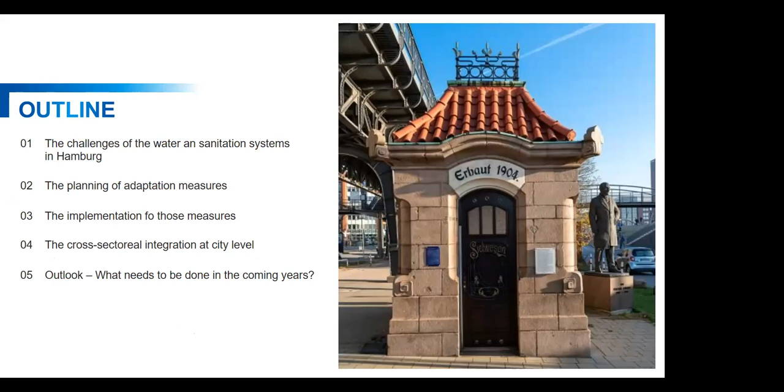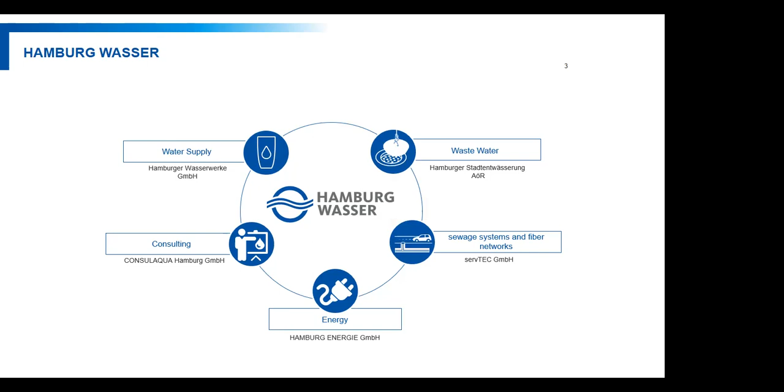So to introduce our company, Hamburg Wasser is a combined company which deals with water supply and wastewater. We also have, until the end of the year, an energy part which provides energy to the city by regenerative energies. They are leaving us, but now they are still with us.

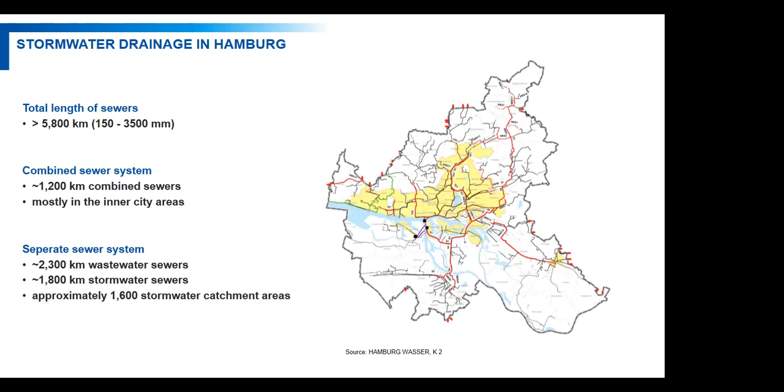So Hamburg has a long history of stormwater management and drainage systems. It has one of the oldest drainage systems in Europe, since I think 1848 or something like that, with William Lindley. A combined sewer system was implemented, and it was added to with a separated sewage system here in the outskirts. The yellow part is the combined sewage system. And we have different stormwater catchment areas.

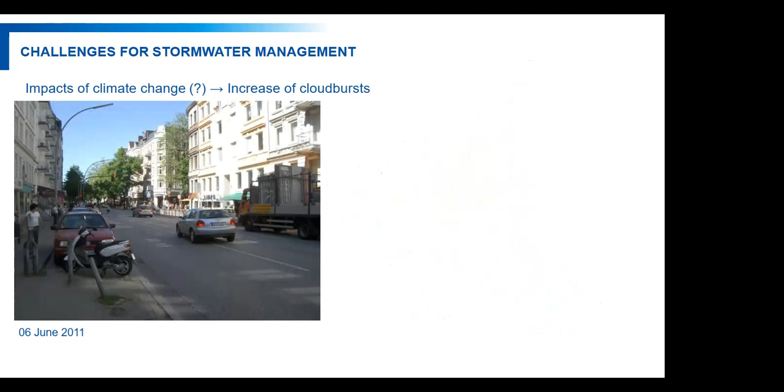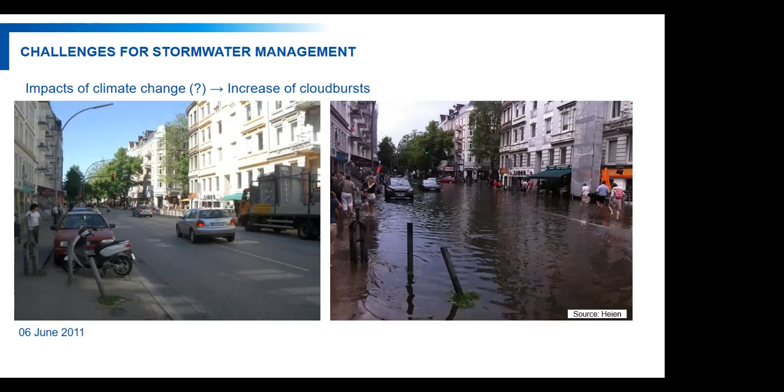So what does it mean for us? We have a lot of stormwater challenges. Is this a part of the impacts of climate change? The increase of cloudbursts we are also recognizing here in Hamburg. This is one example of how it could look. In June 2011, we had this example in one of the central city parts, and therefore we are trying to find solutions to reduce these events and reduce the high damages that these kinds of events cause.

On the other hand, we have a long sewage system which needs to be maintained and performed, and this is a challenge as well. And on top of this, there's climate change with higher temperatures, heat waves, and droughts. In addition to that, we have high tides on the River Elbe in Hamburg, and this means that we have restrictions for the free drainage into the River Elbe if there's a high tide, for example. And the probability of heavy rainfalls is increasing. This is what we need to deal with.

And Hamburg started with that in the early 90s to reduce the discharge into the rivers by a kind of relief program. That means that we have built interceptor sewer systems underneath the existing sewer systems to reduce the overflow into the river and to improve the water quality of the rivers all over the city.

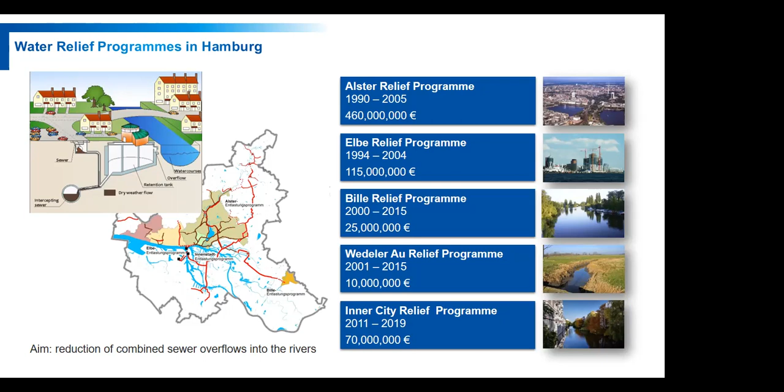So the last program was finished in 2019 with the inner city relief program, and we have a really good improvement of the water quality. So sometimes people are now swimming in the River Alster, which is one of the main rivers here in the city. And that wasn't possible 20 years ago, I think. That's a good success.

Another program which was started in 2009 was the project RISA, Rain InfraStructure Adaptation, and the idea is to develop Hamburg as a water-sensitive city. It's a cooperation between the environmental agency and Hamburg Wasser, and many stakeholders are involved with this, like the municipalities in Hamburg, the different districts, the urban planners, the traffic planners,

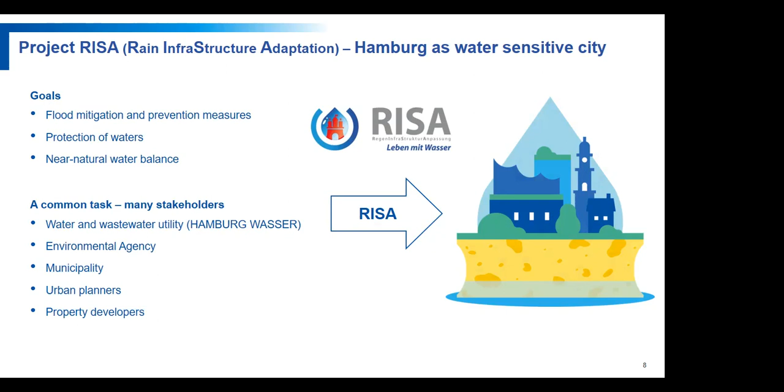people who are dealing with landscapes, for example. And the goals are to mitigate floods and do prevention measures in the rivers, to protect the waters in the city, and to gain a near-natural water balance. To meet this, we are trying to have a transformation of the urban water management. This means that we are trying to keep the robust sewage and drainage system within Hamburg, as well as to disconnect as many surfaces as possible with cooperations.

For example, this is a picture where a school was disconnected from our sewage systems, and we have tried to increase the infiltration rate underneath playground elements. Then we have some different multifunctional plants for rainwater treatment and stormwater management, but we are also lucky that we have a redundant water supply.

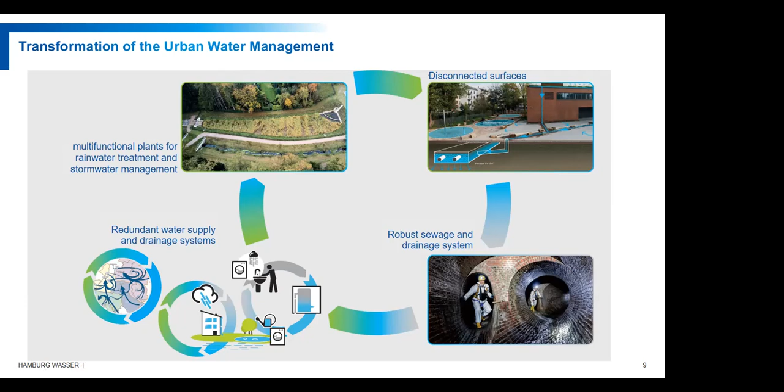Our fresh water is coming from the groundwater from different parts of the city, and this is very helpful for us, because they support each other. And on the other hand, we have one plant and one settlement where we are trying to close the different water cycles, like gray water cycles, black water cycles, but also rainwater cycles.

So what would the future look like in Hamburg? What is our main guiding strategy for Hamburg to become this sponge city? Here on this picture, you see different examples how to do this. So the aim is to reduce the runoff, the rainwater, to increase the evaporation and the infiltration rate within the city. And here you can see different examples.

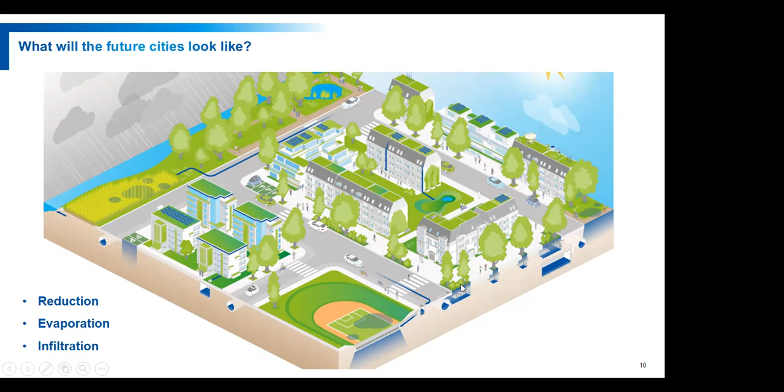For example, here on the first part, retention, green roofs where rainwater can retain on the rooftop. So here on a lot, to keep the water within some gutters, for example, to increase the rate of green roofs, to keep the water within the streets like tree rigoles. I will show you some pictures later. So here are some images of what this means in detail.

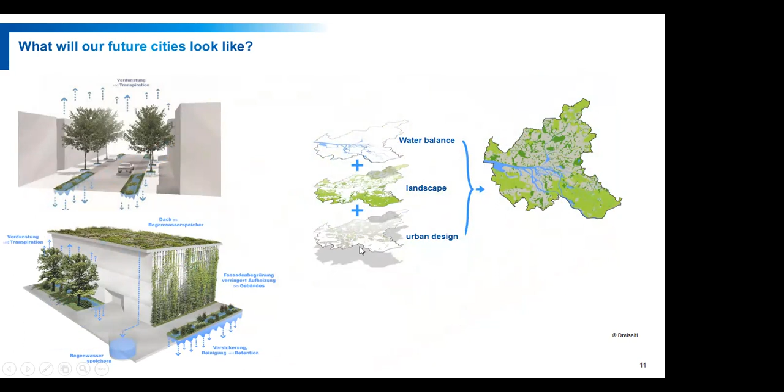This means to transform the streets, to transform the buildings, but also to think about urban planning and urban development as a whole picture, to combine water management with landscape architecture and urban design. This is what we are doing now, and we are talking to the urban authority about how to do this. To achieve this, we need a multi-stakeholder approach.

We are cooperating with different stakeholders in the city, like the State Ministry of Urban Development, the Environmental Agency, the Ministry of Transport and Innovation. Hamburg Wasser is one stakeholder, for example, but we are also working together with research at the university within the city to find some new ideas. And we have the district authorities also on the table with different programs.

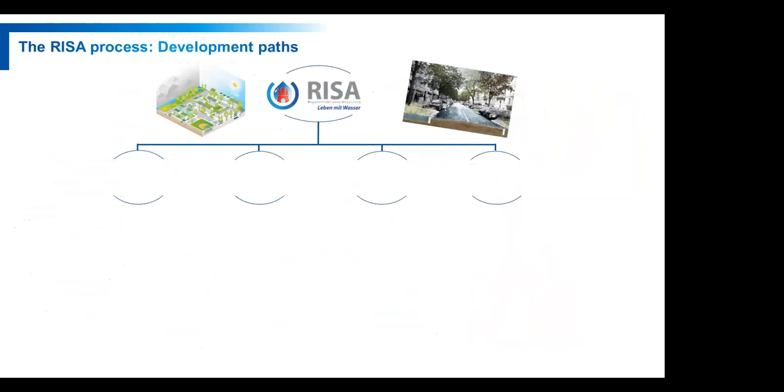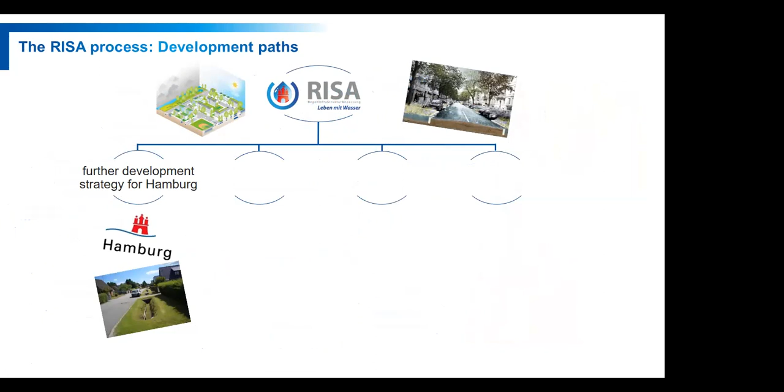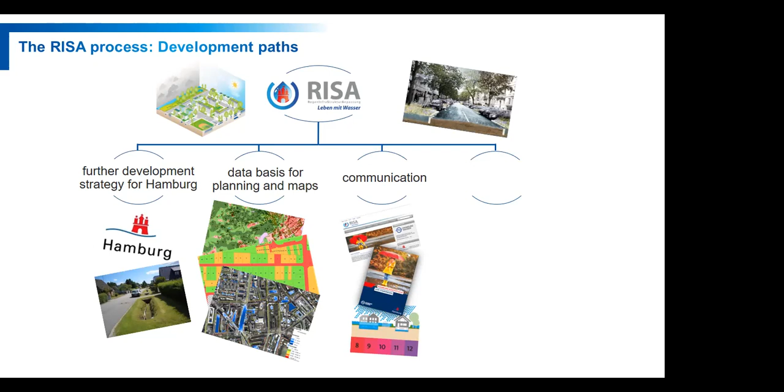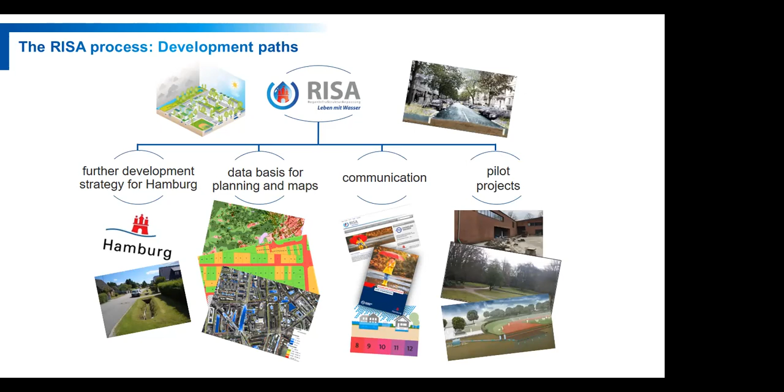The parts of RISA, or the different development paths, are these 4 steps I will show you now. We are talking about the further development of the different strategies in Hamburg. We are creating databases for planning and maps. We are communicating via different channels like our website, brochures, information tools. And we have to have pilot projects to see how we could implement it all over Hamburg.

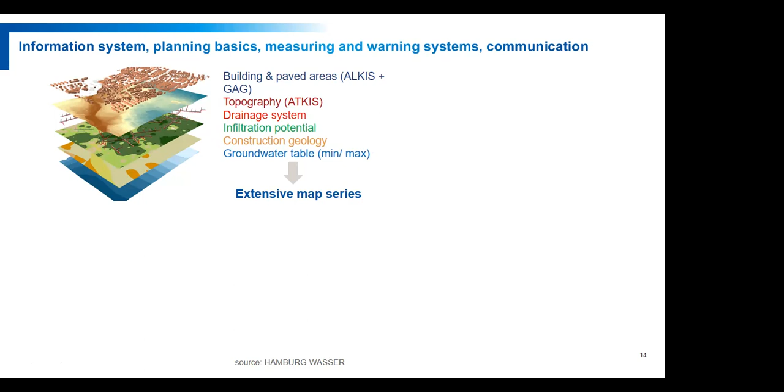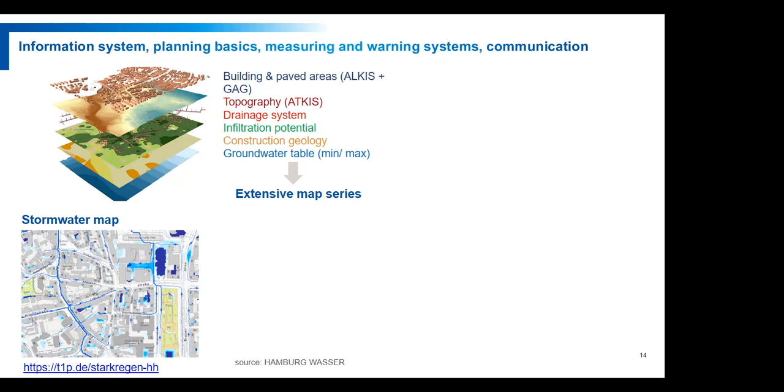So first, I would like to show you what we have regarding the information system as planning basis, for measuring and warning systems and communication. In the first part of the RISA project, we started with several maps which have information on topography, drainage systems, the infiltration potential, construction geology, and groundwater table. And one of the newest is a stormwater map, which shows where the low-lying areas in the city are, and where there might be problems during a stormwater event.

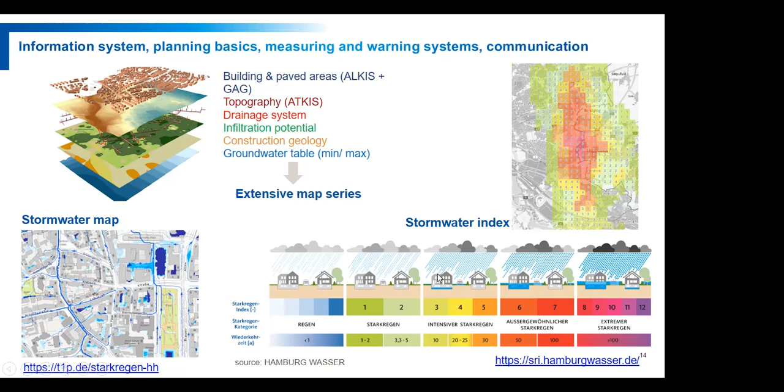And with the increasing numbers, you can see that there are some extreme events too, which our sewage system is not able to deal with. And then the people themselves need to protect, and we need to cooperate with the city and urban authorities for that. I want to give you a closer look at the stormwater map, so you can see how it looks. It's information which is available for everyone, for you too, so you can just click this link and have a look.

There is various information on this website. It's meant to inform the property owners about their situation on their lot, but it's also information for urban planners and traffic planners on how to improve the streetscape, for example, and the urban design and urban spaces, to keep the water where it is and to reduce water flows within the city. It's a topographic map. It's not a dimensional simulation of heavy rainfall events, so it's not a dynamic one.

Another map which is very helpful is a map on the infiltration potential. Here you can see it's based on the groundwater level and the soil composition underneath the city. So it's helpful to see where we can reduce sealing, and where we have the possibility to use the infiltration of rainwater, for example, all over the city.

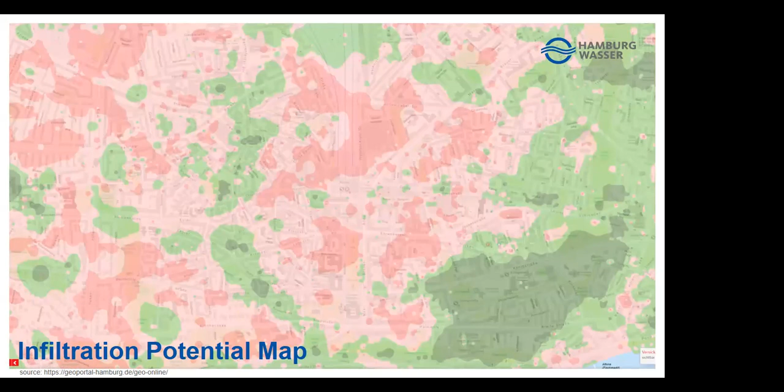To gain these goals, we have different cooperations, for example, with schools. We are trying to disconnect the schools, and we're supporting the schools authority, which is to reduce the connection to our sewer system with different examples.

Sometimes we have workshops with pupils where they have a look at their schoolyards, how to change the design of the schoolyard to improve the situation there, and to find places where the water can be caught on schoolyards themselves, maybe on the parking lots, but as well to have some spaces where water can be kept all over the area. Another example is the stormwater playground in Hamburg, Neugraben-Fischbeck.

It's a good example which shows how cooperation can work. We had several floodings nearby a school there, and the stormwater retention basin was too small, and we had no space to find another place. So we looked around the area, and we found this playground, and we started a cooperation with the planning authorities to keep the water of heavy rainfalls and

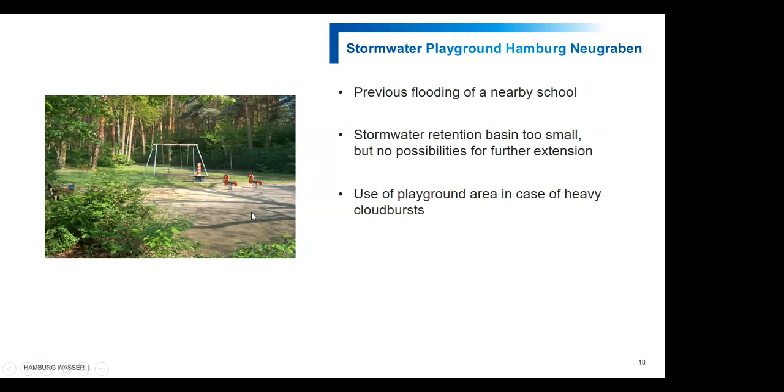cloudbursts on this playground. And here you can see how it looks during dry weather and cloudburst. So the water is kept there in these low-lying areas. We have some swales there to improve the infiltration. And the water drains as well to a protected well area and contributes there to groundwater recharge too.

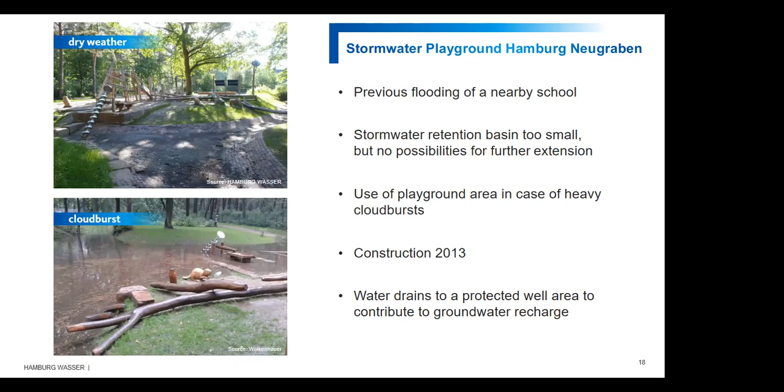Another, almost new example is the sporting facility at the Hein-Klink-Stadion. There we had an interesting situation. It was a hotspot for flooding. We needed to increase the drainage capacity in the higher parts here, because our sewer system wasn't capable to catch all the water. There was a flooding of a subway station as well, and we had the problem that the hydraulic situation of this river here wasn't able to keep the stormwater in case of a heavy rainfall.

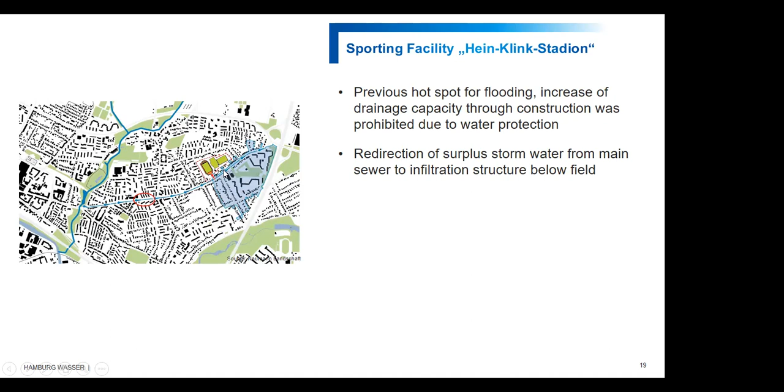So we needed to keep this water here in the upper areas. And by coincidence, this sporting facility needed to be refurbished, and we started to talk to the authority which was in charge of the refurbishment of this area, and we had the ability to install here a system to retain the water on the higher area.

So we have here a tank which keeps the sands and the bigger parts which come from the streets, and then the water flows down here to the swales and will be kept and infiltrated into the ground. And if there are heavier rainfalls, then the water can also be kept on the lower part of the sports field. So it's quite a success now, and I think it already kept some heavy rainfalls, and it keeps 500,000 liters. This is the capacity we do have.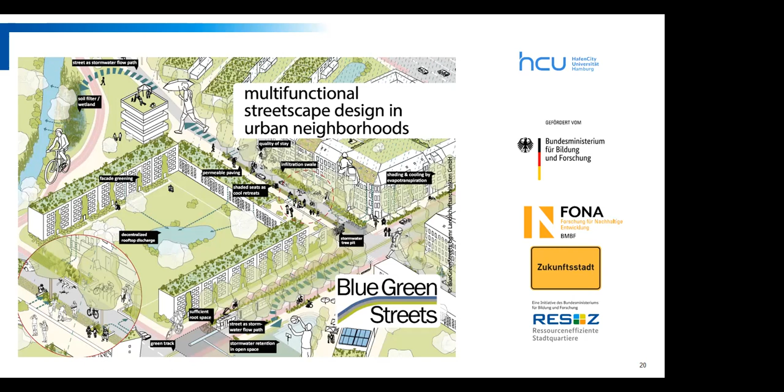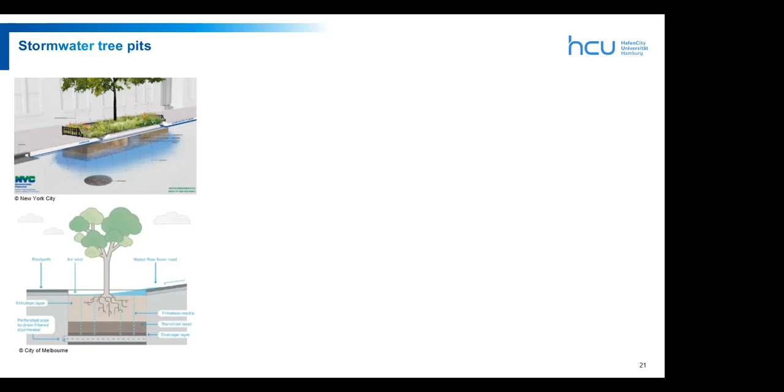So one example I want to show is how they are trying to work within the streetscape. They are trying to implement some stormwater tree pits in Hamburg, where the stormwater can be kept in these tree pits to give the water to the trees, but also to infiltrate it into the ground. So this is an example in Hamburg Harburg, which shows that the water is kept on the rooftops and will lead to a water reservoir here.

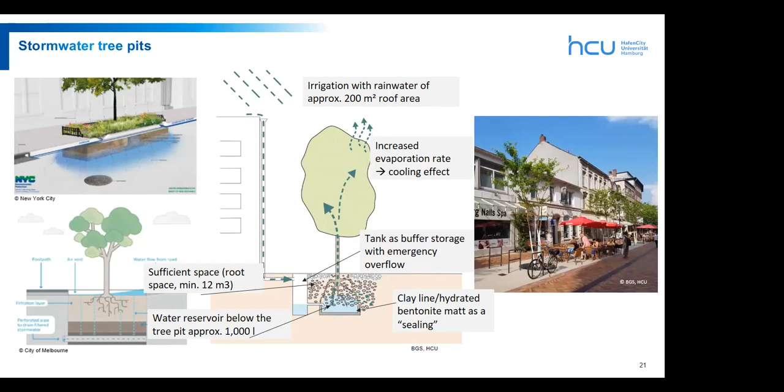There's an overflow to our rainwater drainage system too, and then it will be led into the tree to provide the tree with water, and that increases the evaporation rate and the cooling effect within the streets, and it helps to irrigate the tree. So here you can see the picture of the now installed trees. They are still a little bit small, but it's a possibility to improve the situation within the city. Another example are retention green roofs.

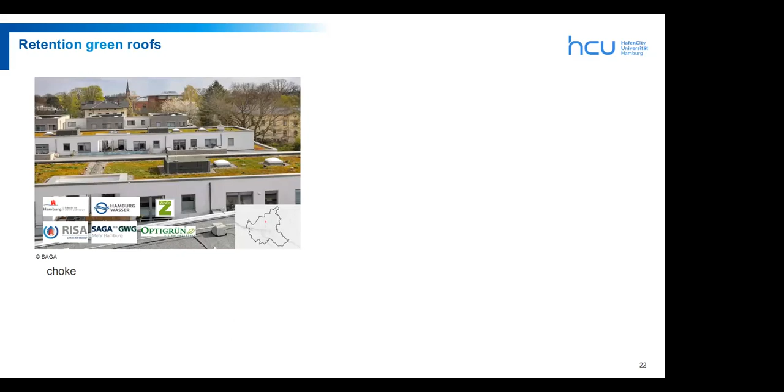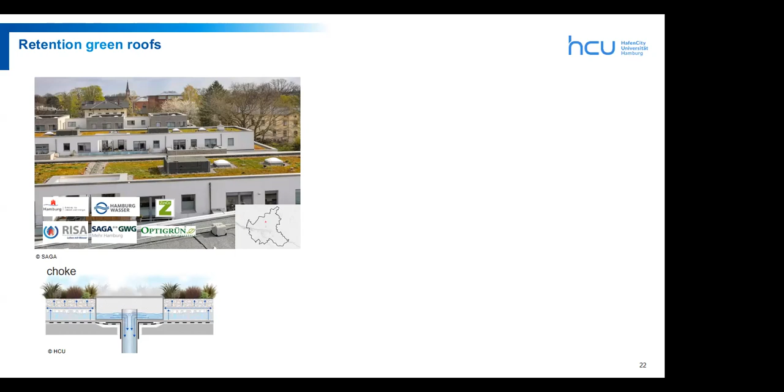Like here, it's built on a housing, I don't know the word now, but it doesn't matter. So it's built on different houses. They have different examples like extensive and intensive green roofs to compare them. They have these chokes on the retention green roofs which keep the rainwater on the roof, and they measure the flow from the roof and see how much water can be kept there.

Here you see some pictures of the construction phase, and you can see here the different examples of the green roof. No, this is the precipitation, and here you can see how much water runs off from the green roofs during an extreme event. And the best case is this lower part where we do have a high rate of green roof retention, and you see that only 17% runoff is happening during a heavy rainfall event.

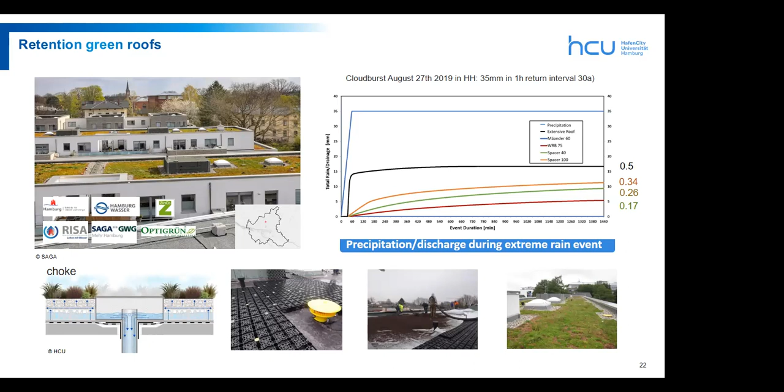So where do we stand now?

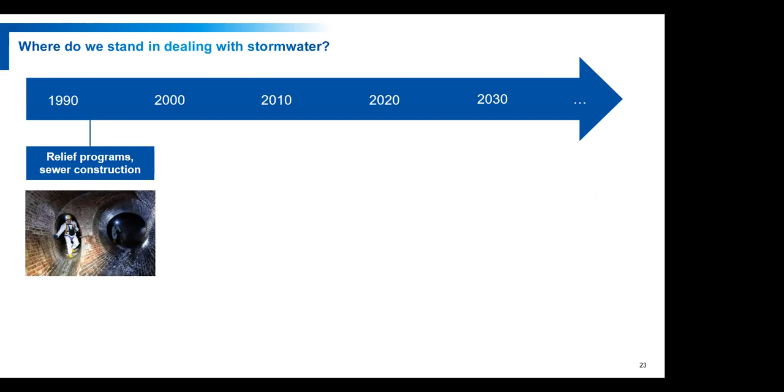We started in the early 90s with a relief program of the sewer construction. In 2009, we started with a RISA project as a community task, a common task all over the city. A lot of information basis was developed. There is a structural plan which is kind of a strategy for Hamburg, which is now being implemented by different stakeholders, and which combines different measures how to do this.

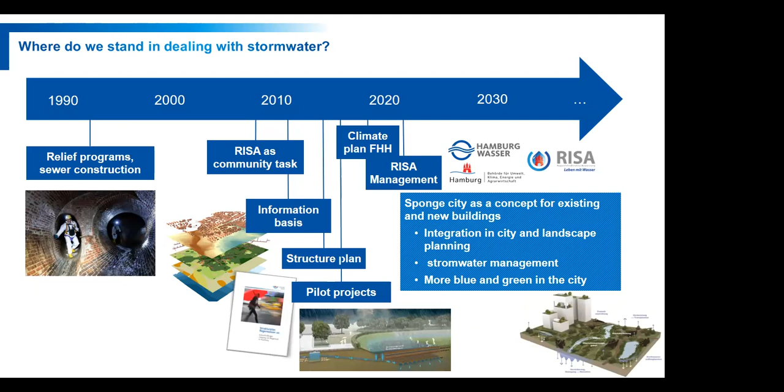And with this, we started a closer cooperation between the environmental agency and Hamburg Wasser to be more efficient and to realize this strategy and these ideas of stormwater management, and therefore we're going to the future. So sponge city as a concept is a concept for existing and new buildings. That means we have to integrate it in the city, in the landscape planning. It's not only stormwater management, it's more, because it has to be part of all parts of our planning systems, and it needs to have more blue and green in the city to do this.

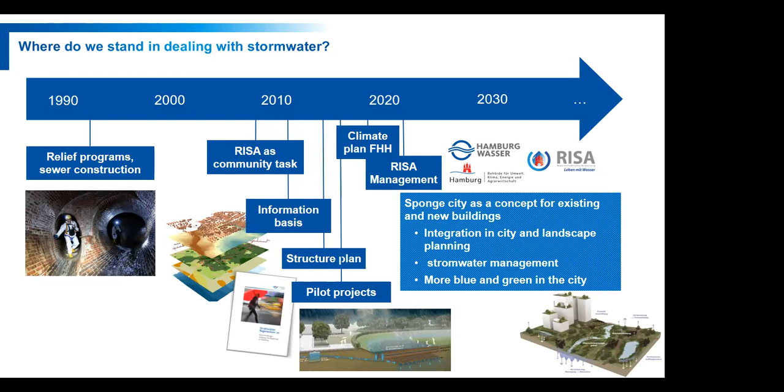Now I'd like to come to the conclusion and summarize a little bit. So climate change and further urbanization ask for a new solution in stormwater management. It means that we have to think about multifunctional areas, because in Hamburg we have the problem that there's not so much space to keep the water all over the city, but it needs to be done. So our cities need to be adapted towards the sponge city concept to reduce the direct runoff of the rainwater, to retain the stormwater, to increase the infiltration wherever we can, to increase the evaporation, and to implement the blue-green infrastructure on the roof, on the plot, on the street, in the neighborhoods, and all over the city.

So we need to reduce and mitigate the risks via multifunctional uses. It's not possible to just plan a sewer system. It needs to be integrated in different facilities. And we need more examples to continue with this.

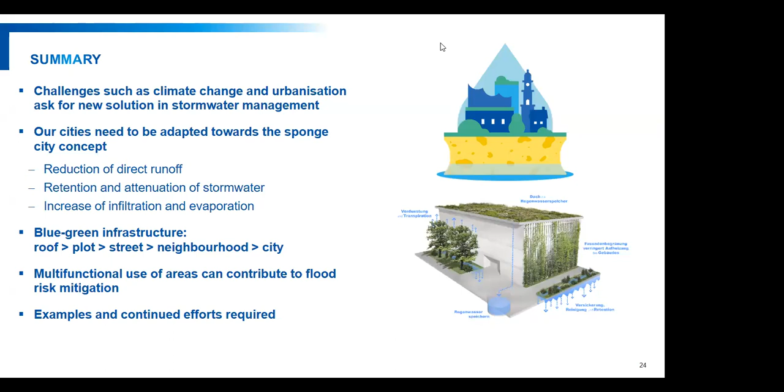Just quickly before we go into the discussion, I'm sure there's many questions coming. I think it was a very useful and insightful presentation, with many takeaways, of the different technical solutions that are out there, the integrated technical solutions in urban water management, the management approach, this cooperative planning and design approach, and it seems to me that it's a very progressive step-by-step approach. You mentioned that it began in the 90s, and up until now it's still going step by step, and many more examples are needed, but you already have many experiences and learnings, and that will be interesting to hear more about as well. What was working very well and valued not just by the different partners, but the community.

I also saw high potential for increasing water literacy in the population with the different approaches at the schools, having them involved in the projects that you're doing, and also the internet sites that are publicly open and available for people to learn about their own individual water management dynamic on their own plots, or at least in their neighborhoods. So I found it very fascinating and very useful and very applicable.